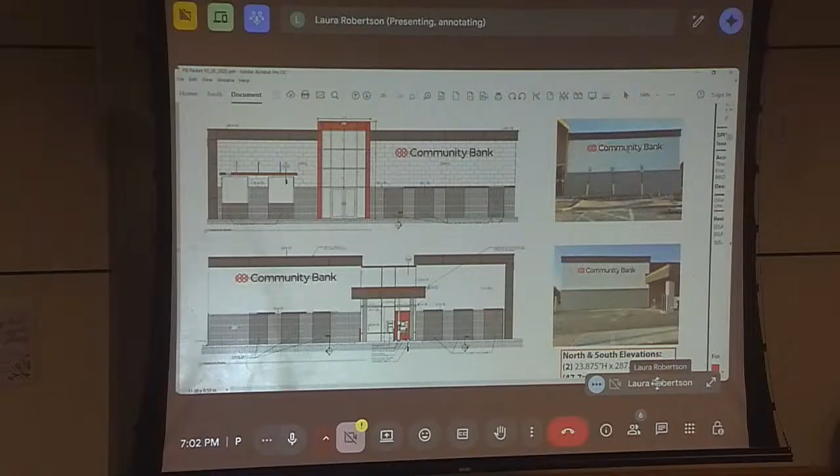Yeah, so the resolution is pretty straightforward. This is a code compliant signage package. We reviewed this at the last meeting. Open up to discussion. Anybody have any comments or concerns? Okay, looks pretty straightforward. So if you have any questions for the board, you can ask him. No questions from the board, as long as you have everything you need from me.

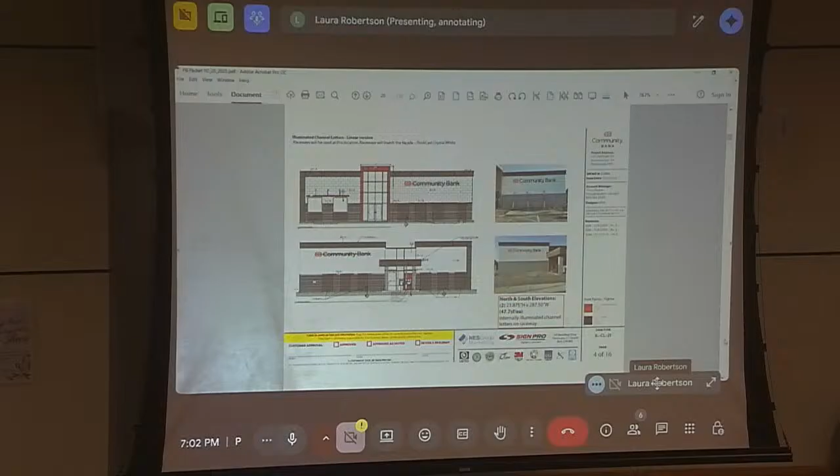Okay, next up is Resolution 2025-29, a resolution to make a recommendation to the town board regarding a site plan application requiring a special use permit for the operation of a place of worship at a single-family home at 3406 Albany Street. I am the project lead for that.

So the way that we're going to do this special use permit is I'm going to read the resolution and the conditions first. Then we are going to get the motions that we normally do. And then there are some findings that were part of your packet. We're going to read those findings, go through each one. And then if that needs to be edited, Ms. Robertson here will take those notes. We will then include those findings into the recommendation package that goes to the town board. If from that discussion, we need to have any other conditions or anything needs to be amended, we will then vote on those after, okay?

So now, therefore, be it hereby resolved that this Planning Board and Zoning Commission hereby recommends that the town board grant a special use permit for the operation of a place of worship at a single-family dwelling at 3406 Albany Street, as shown in the aforementioned drawings, subject to the conditions below and final site plan approval by the Planning Board. The findings for this recommendation by the Planning Board are attached to this resolution.

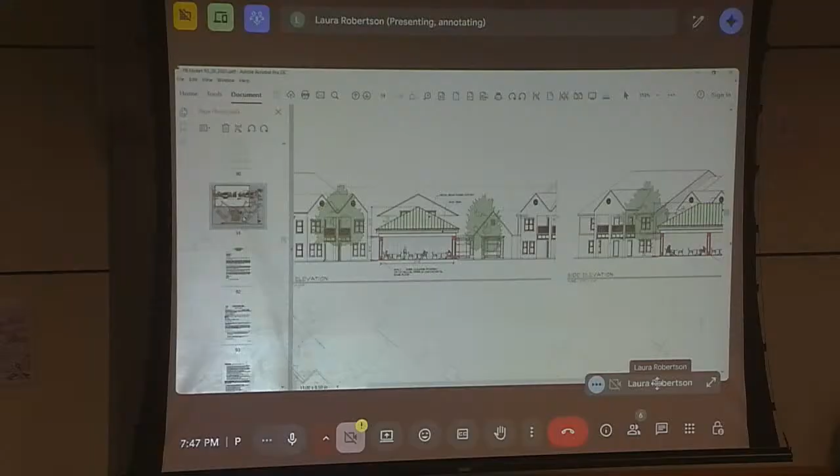Okay, there's no further discussion. Ms. Bergami, could you please call the roll? Mr. Laflamme, aye. Ms. Strang, aye. Ms. Bilowski, aye. Ms. Gomes, aye. Ms. Gold, aye. Chairman Darpino, aye. Resolution passes. Okay, that's it for new business.

Now on to discussion items. First up is 2757 Aqueduct Road, Niskayuna Harbor, an application for site plan approval for a planned unit development. Project leads are Ms. Strang and Mr. Laflamme.

Hi everyone, Chuck Bafundi, owner's rep. Good evening. So where we left off last time was, I think we got an overall consensus with the board that the sketch plan was in a good format. We reduced density, played with the layout to create better sight lines, and left that meeting with an overall outlook on trying to focus in on more of the conceptual layout of the design for utilities, which we illustrated at least a sketch concept of where drainage structures would go, stormwater ponds, water, and the low pressure sewer infrastructure for the force main.

We also focused on the recreational components with feedback we got from the board members and the planning department, adding sidewalk infrastructure from Aqueduct Road down through the initial phase of the townhomes, crossing the bike trail and connecting into where the overall clubhouse component would be, down near the pond. We then added a circulation trail around the rest of the core of the development, which goes around essentially the boundary of the property between the Canal Corps property and the bike trail.

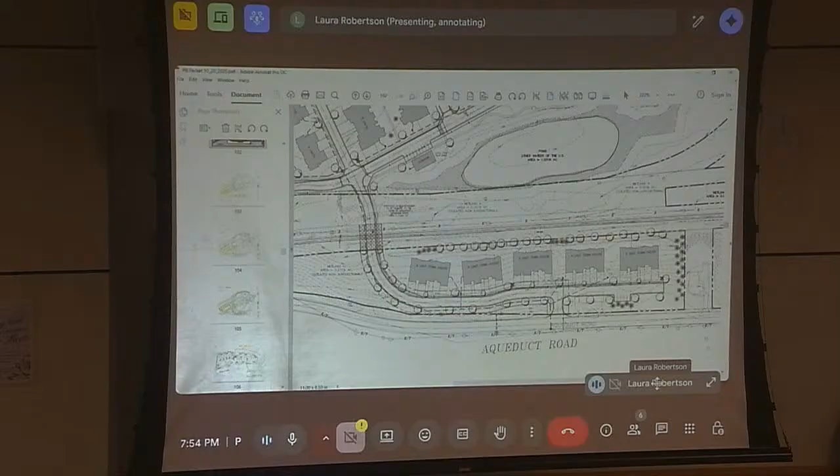So the initial phase, and I've been talking to Laura and Clark about phasing. Laura, could you scroll down to... no, it's okay. The first phase would be those first 20 townhomes out along Aqueduct Road. And then as we move in, dependent on market trends, it gives us an opportunity to go left with the 4 units if those seem more desirable to the market at that time.

Or we could go right once we cross the bike trail to more 8-unit, which is more of a big house development. But we've tried to lay this out so it has feasibility with market trends and gives us room to pivot left or right depending on what that market looks like at the time.

And then just the second question, I think you also talked about creating kayak access, but I know that was a little challenging. Can you just recap where that is? Yeah, so over where Laura just highlighted, the challenge is going to be just the grades, right? You can see in the topography there, it's steep. I think Brett did a great job trying to blend everything and make use of the topography that's there.

Aside from that, it just becomes an action of permitting and access with the Canal Corps, which we've done before. Laura and I have somewhat of a game plan and strategy on how to go about that, but it's just an outside agency involvement. We don't own the property, the town doesn't own the property, so we have to figure out what those partnership structures would look like, who takes maintenance and jurisdiction, how they grant us access. But we are illustrating it, and it's something we'll dive into as we progress through the rest of this.

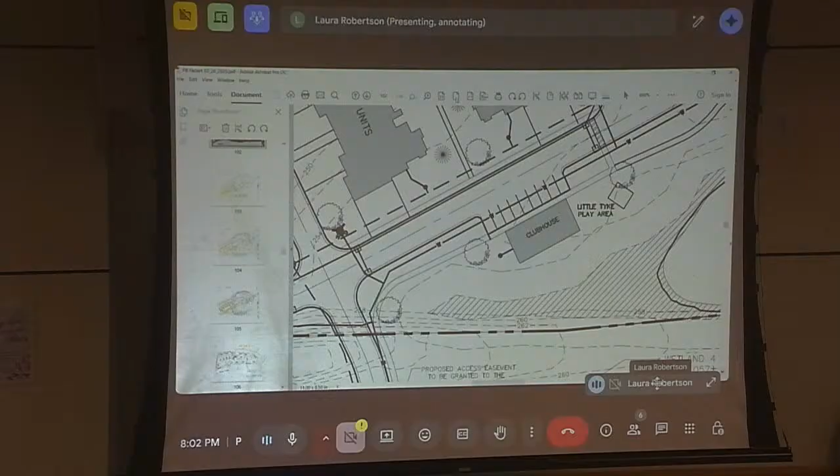I may have missed what you just said - where's the location on this that would be recreational? Was it the bottom? Was it the space in the lane? Our recreational spaces are right as you pull into the development, across the bike trail, take a right-hand turn, and near the 8-unit buildings is the clubhouse component right there. We have access to a little tyke play area, which was a request from the board. The main connectivity through the sidewalk infrastructure all funnels through there. And we thought that pond, especially with our favorable DEC and Army Corps decisions, was a great thing to provide access to within the community.

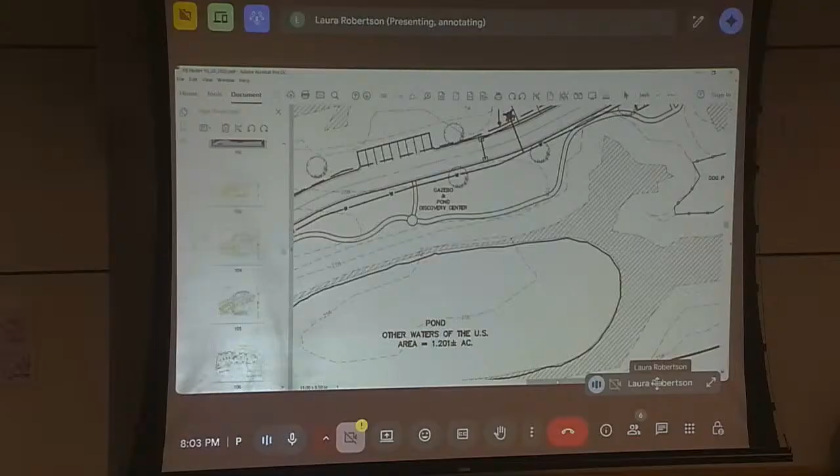We've largely kept a lot of the construction out of the 25-foot buffer that the town has, so I think we did a good job with the layout given the constraints we had. The other recreational components really wrap the property - that trail continues throughout the property along the outside edge and usable boundary, and then we cross the Canal Corps down to the kayak launch. Like I said, that was at the request of the board and the planning department - we're trying to make use of the parkland area. But I'll add that we have to look into the feasibility of that with the regulatory agencies - it may be outside of our control.

Maybe it's something like stone dust or mulch, something with less impact during construction that they'll be more amenable to, but that's still a hurdle we'd have to look into at your folks' request.

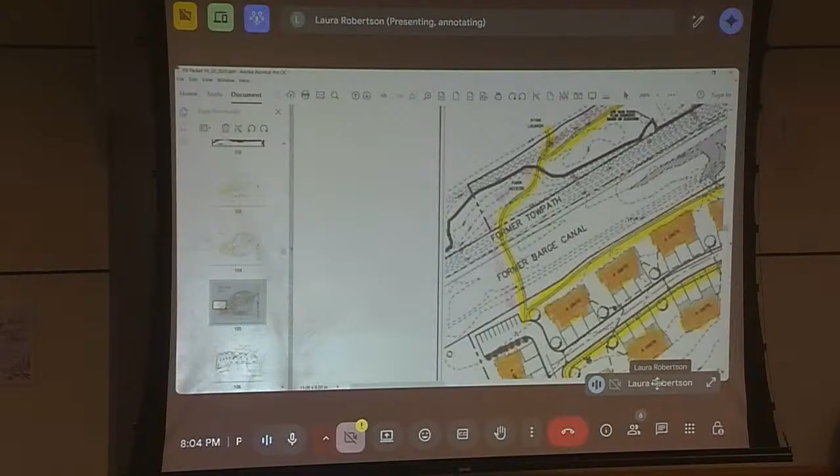So I want to build on that. With the kayak access, someone who's not living there could drive in and park where? I just want to make sure I understand it. So we created a parking lot off to the left right there. Got it, okay. And that's something unique we'll have to figure out with our attorneys, how the HOA is established with that kind of access, but I don't think it's insurmountable.

In terms of what concern? Just public access through an HOA. Yeah, we'll have to figure that out.

So I'll chime in on a couple things. I think generally I like the direction we're headed here. The less dense use of this plan as it's evolved has got some merits to it. The clubhouse, as you guys work your way through the site plan like you did on the previous project, taking a look at what that might finally become, whether it's larger, it's definitely got some space that could work and fit in there. Those are good amenities, where it's located right as you come in, the walking trails, the pond—it seems to be a really good fit. We'll encourage that to be developed.

I do agree with Mr. Laflamme. The 3 units that are clustered, the 8 units in the middle, are really just a tight area with a lot of asphalt around it. I know the previous plan eliminated that central road that went through, but the other component is that those 3 and 8 units have backyards relatively close to each other, and there's a walking path that cuts through. Those have almost no backyards. Maybe some people don't want that, but as we watch a development go in and evolve on its own after the developer sells off and people maintain them, the fences pop up, the barbecues come out, the chairs come out—people start staking their claim.

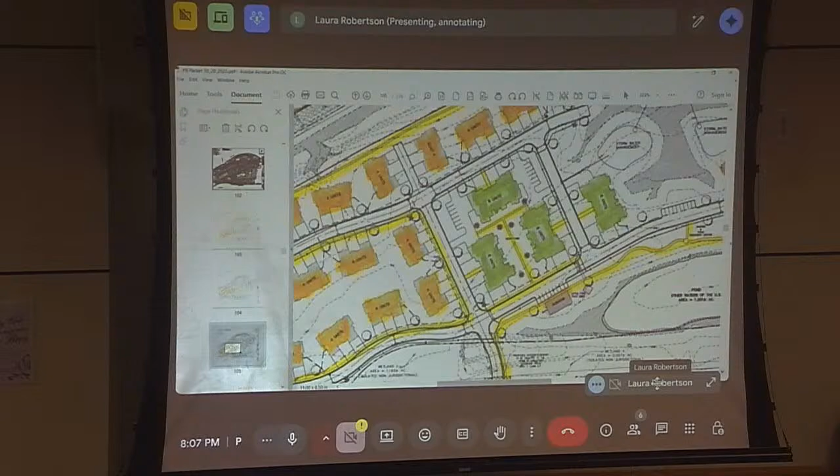Yeah, it creates a bit of a courtyard feel, but let me ask this—would you folks be okay if, overall here, with the way the roads are right now, it's a blank canvas essentially inside all 4 sides of the road? I feel like even with the infrastructure coming into concept design, water and sewer will largely be uninterrupted by any of these changes within this 4-sided area. I think it would be great to dive into the architecture of those buildings outside of just looking at the shapes as they are right now.

Maybe the architectural outlook will provide some type of opportunity. We're in sketch phase, right? We haven't involved an architect yet, we want to engage one. That back side of the project, depending on the scope of our architecture later on with whoever we select, may take a different course from these building styles as they're illustrated with Brett right now. I don't know where the garages will lay out, I don't know exactly where the parking lots will be or the entrances. So I think our biggest goal right now is trying to break into the conceptual design.

There's a lot of effort in concept design into preliminary, not only with outside agency permitting, but trying to deal with all the coordination of that alongside architecture. I guess my concern is I don't want to get so stuck on the sketch right now with the buildings without knowing what the buildings are. I just think it would be great to involve an architect into those conversations. Maybe they can put a different twist on that block, if you folks are amenable to that.

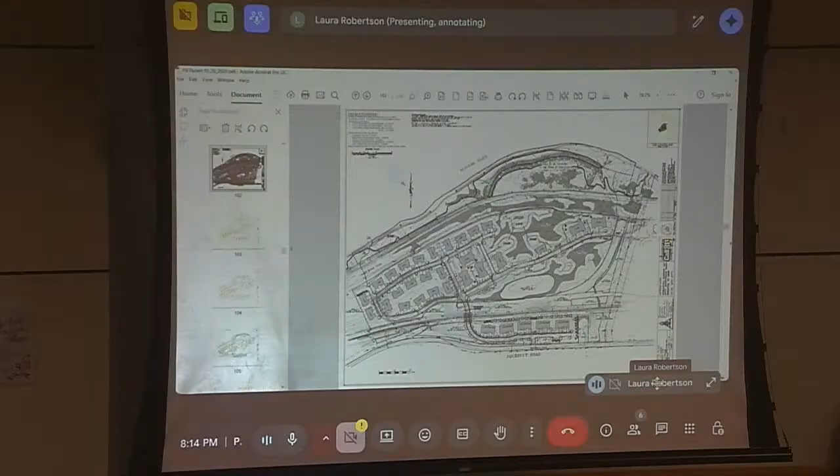I'd recommend any board member take a walk down there, I'd be happy to give you a tour. Since 2025's DEC wetland regs, there's things that are now unachievable. If you look at the wetlands coursing through that area, it's largely undevelopable. So the idea that we can construct this beautified park down there is just unobtainable.

I think Brett brought up a good point at one point: what does parkland mean? Does it have to be this modernized park, or can it just be foot trails and connectivity to nature? I think that's what we can achieve here.

I'm not arguing—we'll look into what we can do to expand the kayak launch area or look into motorized boat docking. But I think it's not largely that kind of park, right? The grade and topo and wetlands negatively affect the potential, is all.

I would agree with that statement. I don't think we're asking for that. I think these natural, unasphalted—not multi-use path, but just a walking path—nature that people could transit, that's great. But the water feature is unique to the property.

And the ability to come visit someone living there and have a place that's safe to put your boat temporarily, that'd be great—just kind of thinking ahead a little bit there. But no, I like the natural approach, everything you described would be perfect.

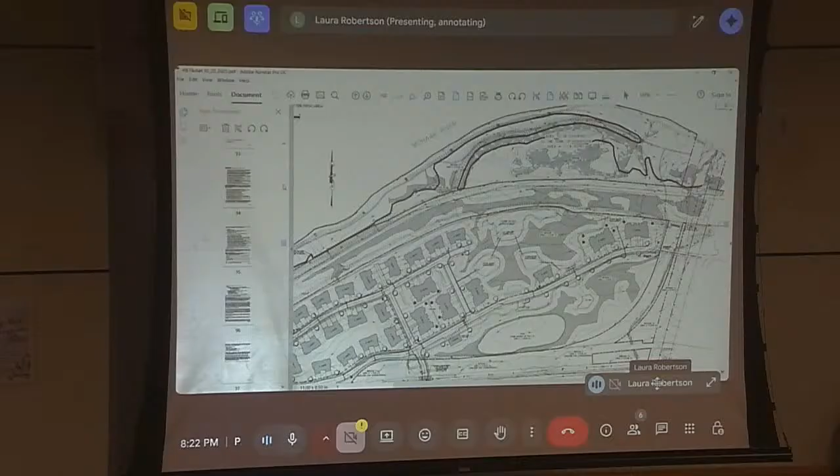Would that be amenable? Yeah, actually Rivers Ledge has a public multi-use path that goes right along the National Grid property and may have accidentally gone onto the National Grid property. So it's not really private to private because it needs to connect into the public multi-use path on Rivers Ledge.

I'd just like to say something I'm very passionate about. Do you know where Fieldstone Estates are on Consaul Road? I'm going to beg you, please not to do that. Because that's something I absolutely wouldn't support. Please don't make them look like cookie cutters. I know you said you were already kind of discussing that.

Do you not like the design of that building, or would you just like to see a variation in color of the building? Because I will admit that we are looking at buying the Fieldstone drawings for the front 20 units, but we talked with Laura and Clark and they brought that up - they do not want consistency in color. We were going to do a variation of color so it more appropriately relates to the building next door with Louisi's Senior Complex. Obviously, we know that some changes will be made to the drawings we're buying through ARB.

Like the exterior material, right. It's like the structural and layout. It was a very good product that the market reacted well to. So yeah, thank you. Okay. Yes.

But Rivers Ledge doesn't have the same orientation along the street like Fieldstone Estates does. That kind of gets back to Dave's comment where you might be able to massage these buildings a little, but I don't think you need to have the exact building locations ready for recommendation for tentative zoning approval. It's a natural process - when you get through doing engineering, you're going to have to tweak something, move setbacks. But where you position most of the buildings, I think is good.

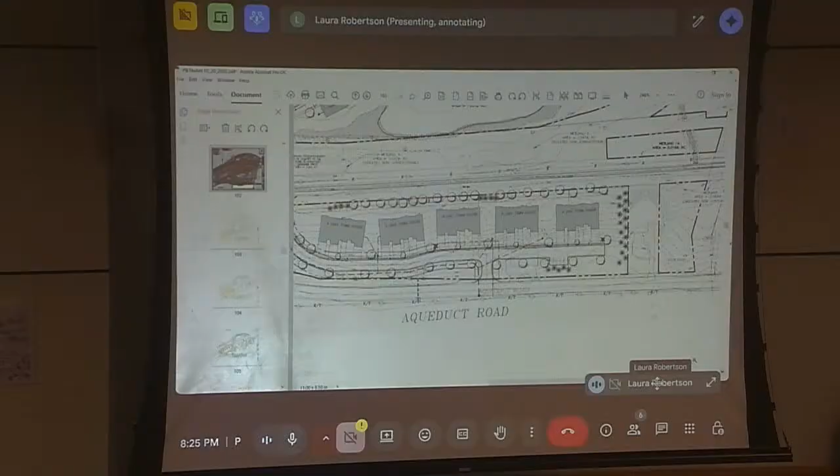So to kind of summarize, you've got some takeaway points here. Take a look at the diversity of the homes, the connectivity to the waterfront, working on some of those agreements with state agencies. And then take a look at the feedback on that central internal loop road where the 8-unit townhomes are - then I think we can definitely keep moving forward. Outside of that, those are the main items to try to move towards a tentative zoning recommendation.

And you'll look into traffic - it sounds like traffic and those things are after the recommendation. I can't remember off the top of my head on that; it may have just been written into the preliminary engineering report. So I'll check. The reason is I don't want a couple meetings to go by and all of a sudden I need it, and it's something that takes 2 months to gather with data collection and everything. So I'll check on it.

Can I ask one question? The sidewalks highlighted in yellow - it says sidewalks and walking path. Is there any way to delineate what is private and what is public? Because I'm assuming the sidewalks are for the residents, but it's all yellow, so if I'm walking on the path, I wouldn't assume I should be walking in between the area of the green buildings, like that would be private.

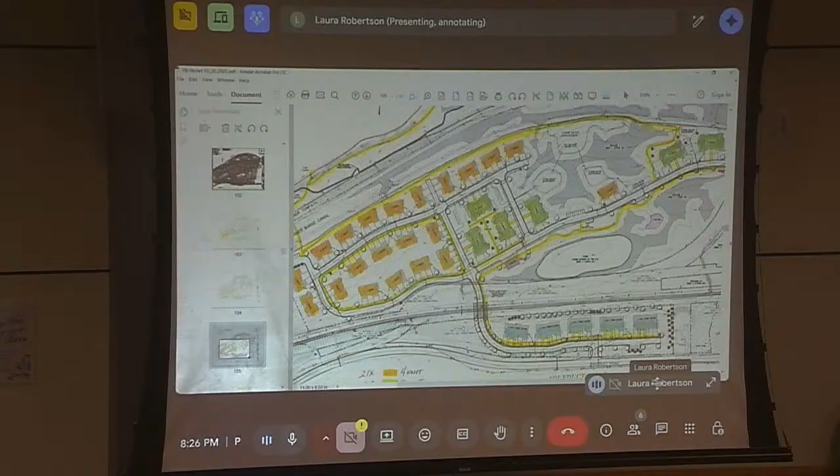Yes, we could illustrate what we would look at as private and public. Like most developers, we may have things that we overall have an outlook for that are written legally in the HOA documents, but I think everybody usually finds their way once they get in there. But I will illustrate something for the board on what our long-term direction is.

And then I just have one question, sorry if you already said it - the 8 units, are they multi-level? Yes, that'd be 2-story. Okay, and when I say double loaded core, it's usually something with common core hallways, right? Our 4 units may be a different architectural design than that.

So that green space doesn't belong to anybody really - is it going to be shared? That's correct. The condominium corp will really just be the building, and everybody will own their condo within the building, but the lands are largely owned under the legal mechanism through the HOA. And I can provide an idea of a write-up for the board to understand that.

I'm by no means a specialist in this, but we have one of the leading firms in our Albany area working with us on it. We could give you an overview of what that looks like.

Yeah, because when I envision it, I mean no one can really just stake a claim, like sometimes if it's single you can kind of say, oh, this is in front of my sliding door and this is mine. But really with this setup, it looks like a communal space.

It is a communal space, and that goes to the point that within the HOA laws there won't be opportunity for fences, sheds, and cookers. There'll be really strict community rules, so you won't have that shared concern of people having a mess of everybody's outdoor accessories in the backyard. The HOA is going to drive the policing of that.

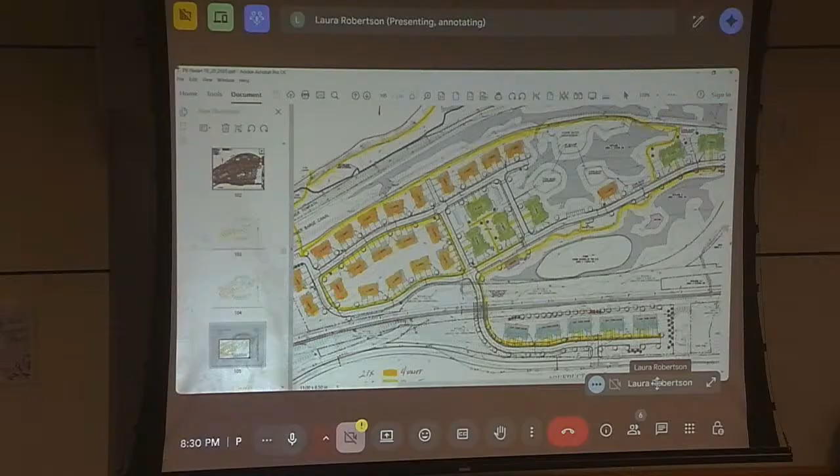Chuck, the other thing that Laura and I commented on, looking at this from the planning department's perspective—I know we're in early stages—but there was no place for residents to gather and sit and look out at the river. River's Ledge has several pavilions where they could have a cookout or take advantage of the proximity to the river. So maybe something like that can be worked in as it progresses.

Yeah, we could look at something in that overall area down by the kayak launch, and we're trying to make use of our pond. But an overall scenic vantage point from the upper topography of the development out to the river is largely going to be obstructed by forested wetlands. I'd love to create waterfront views, but we're not cutting down trees in there. Which the tree council will like.

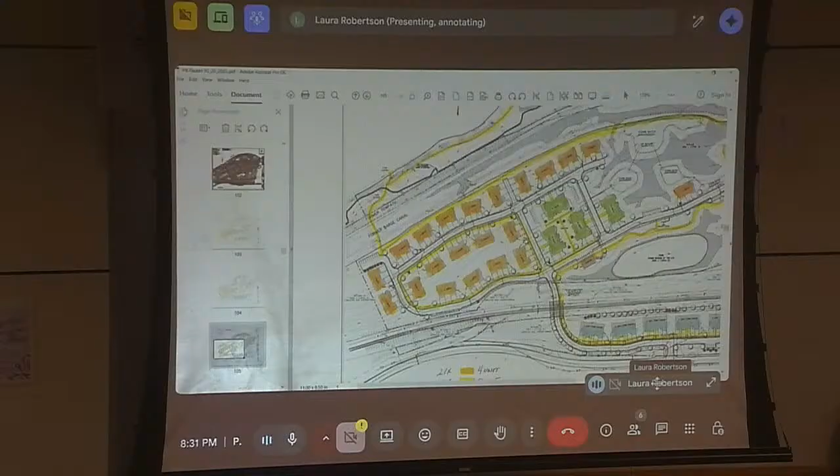Just for the record, Complete Streets and Tree Council have been looking at this and they just want to make sure it's okay for them to walk the property. Absolutely, and if they want to meet me, we could set up a meeting and I can do those walkthroughs. I'll tell them.

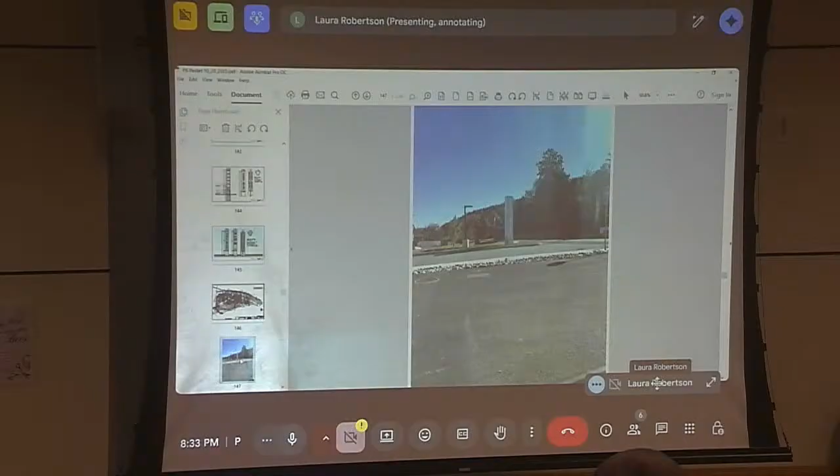So part of the purview of planned unit development is that the planning board is allowed to review this signage, correct, Laura? Mhm. So there's a table that was in the package, just to quickly recap where the proposed signage is going. It doesn't trigger any type of zoning review or referral there.

So let's talk about the marquee bollards that are there. What's the total height on those? I don't know, but I'm sure. It was 16 feet total height, 16 feet 4 inches. So it's definitely something larger than we normally see on typical signage around the area here. What was the design parameters behind that?

I wasn't involved in the design. I actually didn't even know they were going up until I drove by and saw them myself. Yes, ma'am. No, that's okay, I wasn't behind the design of them.

I think that the height of it was coming down on the River's Ledge sign. We wanted to go vertical, not horizontal just because of the location of where they were. They might have protruded into each drive lane there.

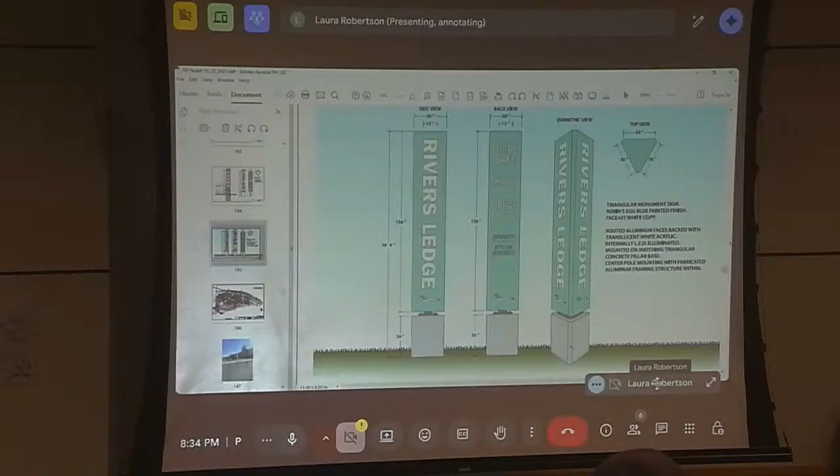Sorry, can you just speak? I know you said you didn't know they were going in, so they were pre-designed and you didn't realize they were being fabricated? I wasn't myself. I wasn't involved in that process with the signage, with the company putting them in. I just wasn't involved in that process at the time, truthfully.

I would say normally the sign companies would give them direction to come. I don't know what this sign company is. No, we know, Action Signs. And they didn't reach out, Laura? No.

I do think on a fast road there's some advantage to a vertical sign with those tight entrances, but it is taller than almost any sign we have in town, I think, probably. I think you're right, Laura. But it's also not, I mean, we do have for apartments, we do have 16-foot wide signs sitting on the ground. This is just this way instead of that way.

With it being a PUD, are there any unique exceptions made? No. I mean, it's something like almost a lesson learned, I think, for the next one, because we really didn't discuss signage during the site plan of Rivers Ledge. It didn't make it in. Because essentially a planned unit development sets its own zoning, the planning board can definitely review these, and if they do feel like it's appropriate, they don't need to go to the zoning board or the town board. It's part of the site plan.

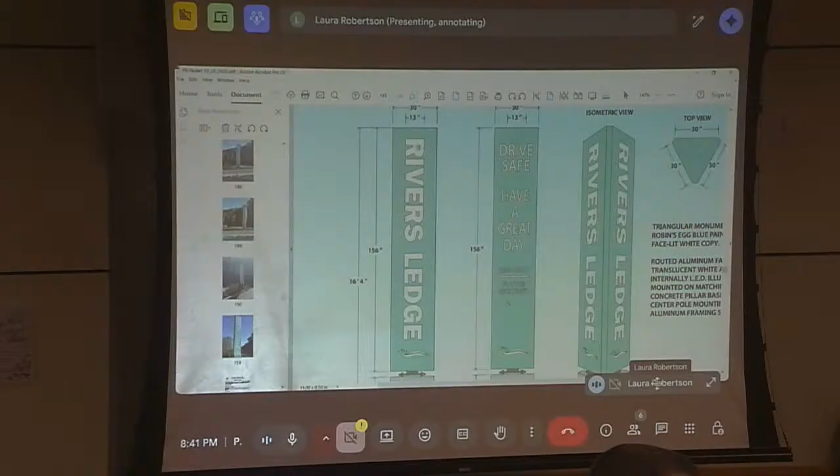Yeah, I agree. I live right there. I actually wasn't sure that they were on at night. I think you can just read the letters. But we do usually require timers too.

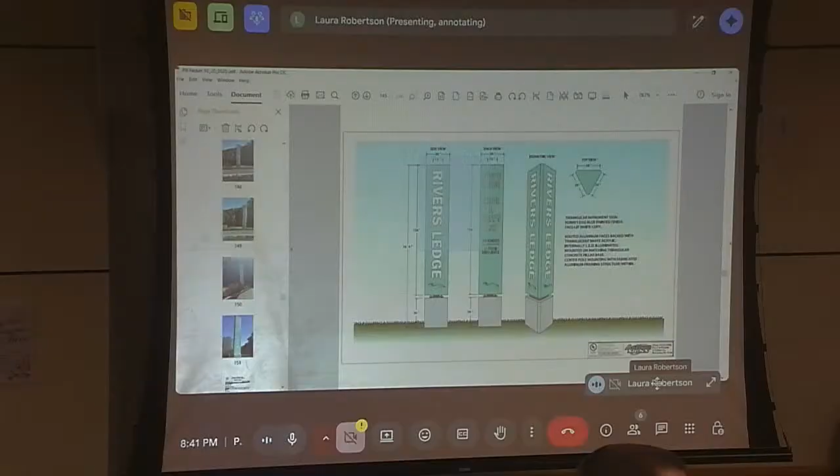But I just want to clarify, the River's Ledge is lit so people can see it when it gets dark - the letters. But the drive safe and have a great day, is that the opposite? No, that's lit as well at night. That faces inside. No, I get it, I'm just questioning.

Okay. You'll probably be surprised, but I don't have a problem with the lighting, because of that safety area. I think it's really helpful - it helps people know for sure where they are. I have not seen it at night, so that might be open to a little revision, but generally, I think it's helpful to have lighting on it.

One of the drawbacks of it already being in place - I concur. I've driven by it. It was subtle, gave me an awareness, but it wasn't like this bright thing sticking out. I'll be honest, I think the height does fit the property, but I also think maybe it didn't need to hit 16 feet. But I do feel like the size gives some awareness, and the large scale of the property, it kind of fits.

And then the monument style sign that you're proposing is in addition to this? Correct, and has not been built yet. And also facing Aqueduct? That's for the next phase. It would not be facing Aqueduct, that's internal. Where would that be?

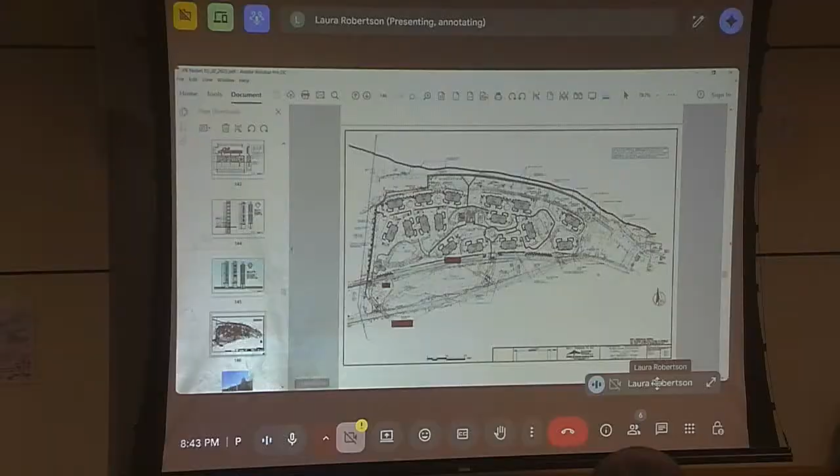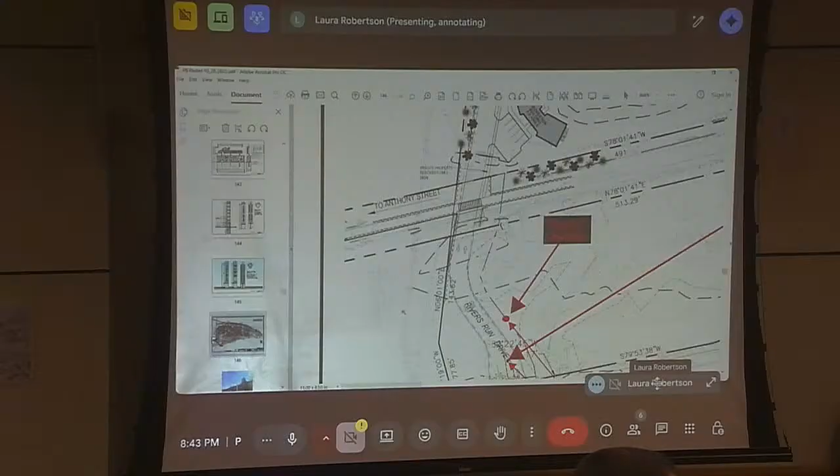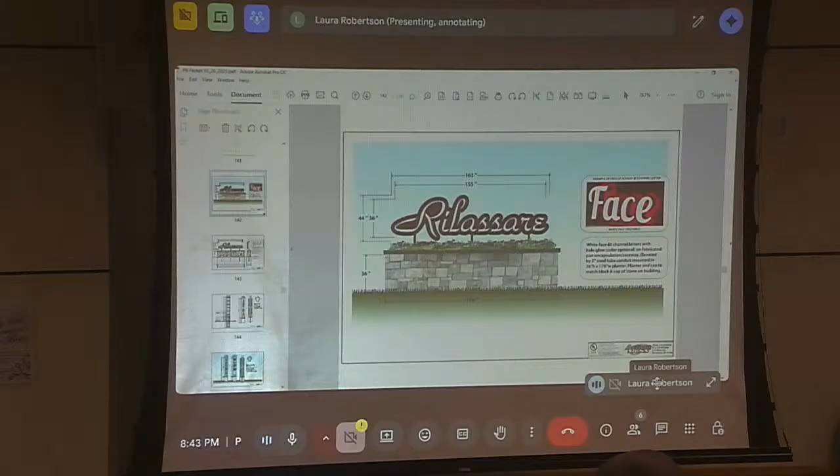One of the unique situations with this is that we could have a project lead get assigned to this and encourage everybody to go by during the day and at night. We've done that with other signage around town for some things and gotten feedback on it. If not everyone's had a chance to take a look at it, that would be helpful in order for us to render a decision.

Obviously you're coming here a little bit begging for forgiveness, but the uniqueness of the PUD may help this case as opposed to a direct order and a violation to have you take it down. We want to work with applicants as they come here. So in fairness to the board and the applicant, we'll have somebody assigned to take a look at it, get that feedback, and between now and the next meeting all of us take a look at it so we can collectively go back and give some positive feedback.

The temporary flags that you put out there, how often do those stay out? For the open houses, typically we like to put them up once a month. They'll come down once we're fully leased at the senior building. As far as now-leasing, we're looking into doing something a little more permanent, which will certainly come to you before we do anything like that.

Was it not currently open? I don't think so. It is open. Oh, it is open? Yeah. Oh, okay, the windows will not be papered over. You can see right through the windows, it's clear, the windows are clear. I think they have some kind of picture on the window. Well, we can look, yeah.

You can't really see the windows in this. You can see some of them though. It looks like they're mostly open. I think you can see through from inside, but from the outside you can just see the pictures.

How about signage? Any change, or is that separate? We should change the name on the sign. If it's code compliant, the planning department would just take a look at it. If it's excessive in size, you'd come back to see us again. The sign is the same size, same color. Is the current sign compliant then? Yeah, I believe it is.

Okay, so if it's pretty straightforward, we'll get a tentative resolution for the next meeting for the tenant change. Thank you. Appreciate it. Thank you.

Okay, next up is 3900 State Street, an application to combine 25 and 17 South Fagan Ave properties with the existing Kia automobile lot at 3900 State Street. That includes removal of one single-family dwelling and extending the automotive sales lot onto South Fagan Ave. The project lead is Mr. Laflamme.

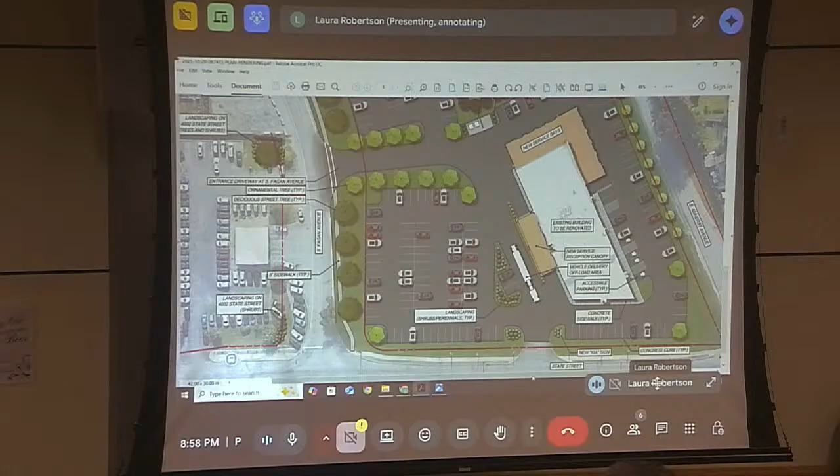The spruce tree is being saved. It's in the corner of the expansion lot toward the top of the page. So this is the spruce tree, and we've got some clearance around it that can be maintained.

We're showing street trees along Fagan and a 5-foot sidewalk connecting to the existing sidewalk on State Street, and proceeding to the edge of the property at 33. So new street trees, new sidewalk along Fagan.

We're also showing trees along Amherst. Those will need to be a little smaller, more of an ornamental tree, because there's a wire that will conflict if the trees aren't a smaller variety along Amherst. So we have new trees there, new street trees here, and some tree planting along the new entrance drive where the truck will be entering to get into the site.

Did you mention they moved the dumpsters? Yes, the dumpster currently is in this corner, somewhat close to the residential property. The dumpsters now will be located here, which gets them to the 25-foot offset from the residential line, and they will be screened there, both by the trees along the white PVC fence and by the enclosure around the dumpsters themselves. So much better position relative to the residences.

I have a question, not to interrupt, but the double stacked parking doesn't exist in this diagram. The double stack parking isn't shown in this layout. No, it's not, and there may be some double stack parking that takes place in some of the lots designated for new vehicle parking over here, but we're not showing that specifically now. The way the layout shakes out now with moving the parking down to the right-of-way line on Fagan makes a little less sense from a layout perspective the way it is now.

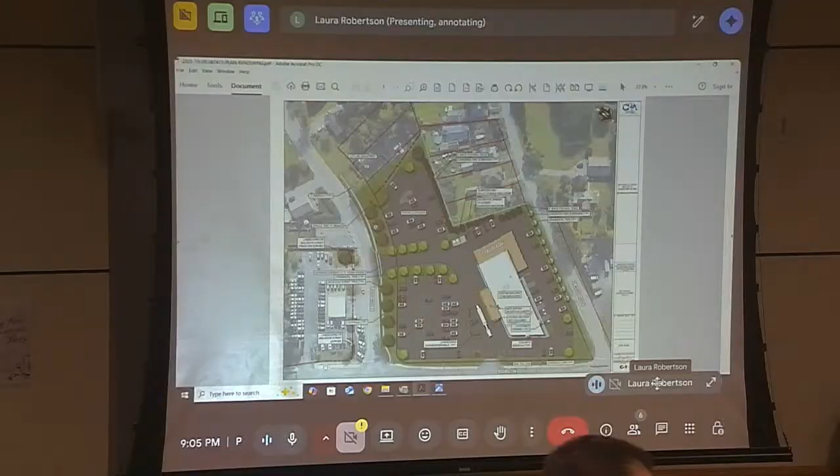So at the end of September, you had the town board meeting and the project was approved for the application, a special use permit. And with that came a bunch of findings. So like we did previously tonight, if this is the plan we're moving forward with, we'll do the same thing - go through those findings and start to refine that. The TDE will be brought on board. I believe the next step is to get this into the final design phase for site plan approval, correct? Yep, we need to go through detailed engineering with grading, stormwater, and advance the plans.

Well, I think just seeing this plan in the packet for this meeting tonight is definitely an improvement. There's quite a lot of enhancement of plantings and green space. It looks like you've thought out using the detention areas as buffers and how to downstream that naturally. Circulation around that trapezoidal site is not easy, and showing where the tractor trailer comes in and discharges out is a great safety improvement, along with all the other pedestrian upgrades around that. It's a tough site - there's a lot of topo there, losing 20 feet from Amherst down to Fagan across State Street. So there's a lot of topo, access considerations to get a tractor trailer on the site - there's a lot going on.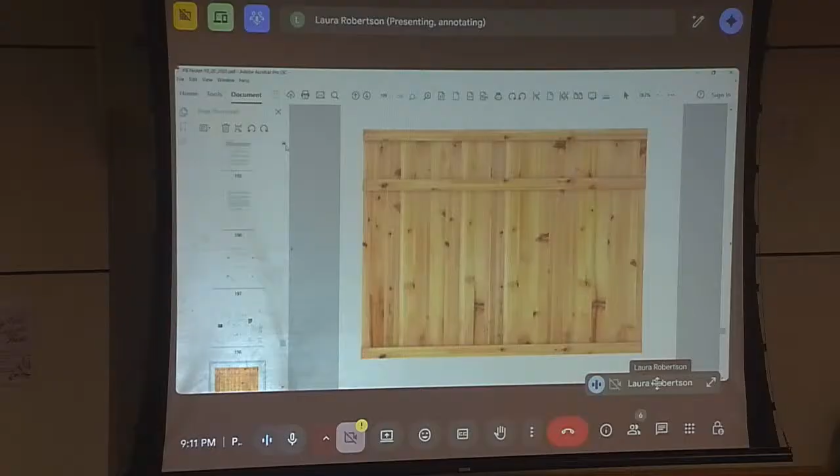It's made to be durable and to naturally weather. In 4 or 5 years we might stain it the way you would a fence, but we thought having it naturally gray was fine. If you folks feel more strongly it should be synthetic material, we're going to do some landscaping around it too. We thought it was the better design choice, but it's certainly no less expensive, so if people prefer plastic or fiberglass fencing, we'd be happy to do that.

I'm sorry, what kind of cedar did you say it was? It's just cedar fencing. So that's more durable? Yes, it's meant for this climate.

And just to confirm, the truck will come from Alton back into the driveway to pick up, drive straight in, pick it up, and back out. They usually come very early in the morning before the schools are open, and yes, they would be able to back in. We've confirmed that.

Actually, I had to Google it because I've never seen an enclosure made out of wood, usually it's a gate of metal or something. It says cedar fencing is very good for the winter due to its natural resistance to rot, decay, and moisture. That's extremely surprising, I learned something tonight.

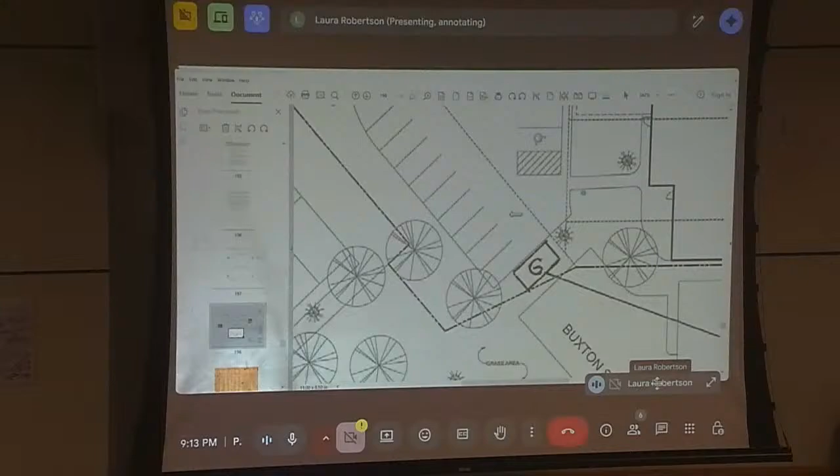Are you saying you want me to come back with a landscaping plan? Yeah, I think we should make sure that the landscaping is on the plan. There is some landscaping there now, but yeah, I can do that. So that would be a more detailed design you're looking for?

Yeah, because we definitely would want to screen it, like a 6-foot fence, which isn't typically allowed in the front yard of a home. So it's tall and it's going to be basically in the front yard of that home on Buxton, so I definitely think you're going to have to soften that transition from the residential home to the commercial. Yeah, we're happy to do that.

We know that it's kind of in the front yard. There's kind of a berm there, if you remember, from when Buxton was closed, so it's another consideration, but yeah, we're happy to come in with that.

I actually have quite a bit of plant material, some hydrangeas and other shrubs that I purchased from Northern, so we can use that. Would I have to come back for another meeting to get that approval? Yeah, you have to come back for one more meeting anyway, at least. Yeah, we can, right.

So you can take this plan here and show landscaping on it, as we just talked about. And then we can have a tentative resolution for next meeting, because it's relatively straightforward.

The other thing that would be helpful is if you took a photograph, maybe looking down from Buxton, and one from the back parking lot. That way we can see where it's going to be positioned in relationship to the building and the back area adjacent to the school. That's always helpful.

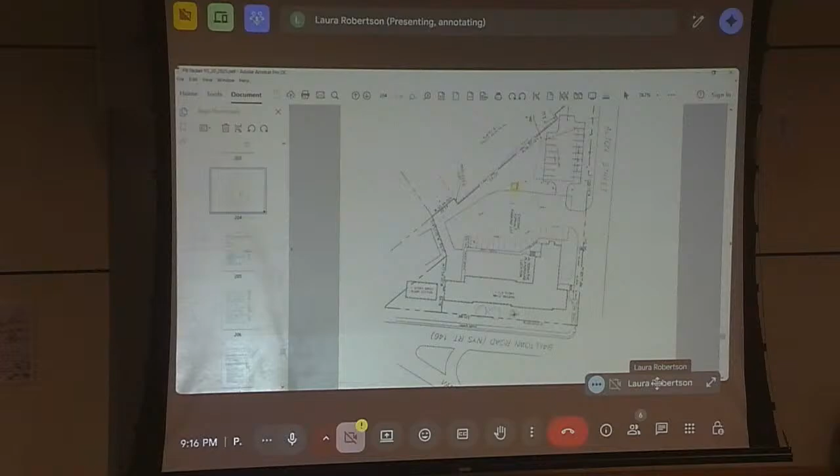All right, so anything else you want to see on the next go around besides landscaping? Yeah, there's photos. They're helpful to see. I think if anybody drives by there, if you pull in the lot, you'll see that with some additional landscaping, it will not negatively impact that house that is there. Okay, all right, thank you for your time.

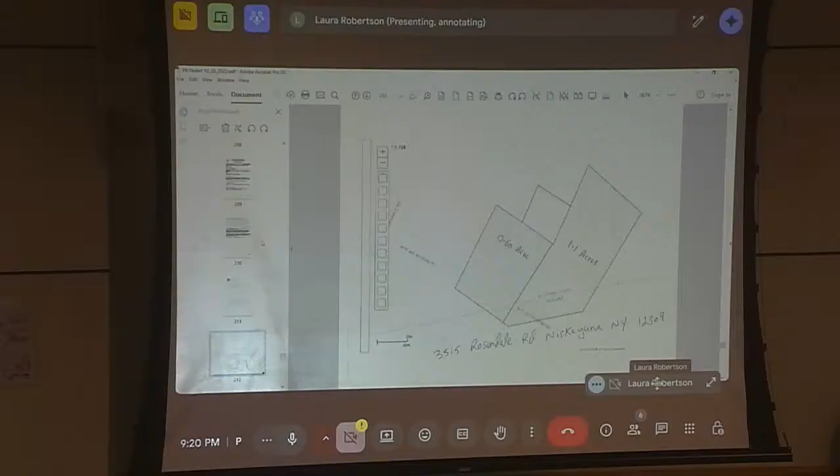Which would then be like a lot combination, wouldn't need planning board approval. Correct, you could just combine them. Okay, so I think we understand the intent of what you're looking to do here. But the next step would be to get an actual survey drawing with real contours showing the locations of the housing, proposed driveways, where the lot would be divided up. Then once that's submitted to the planning department, we can take another look at this.

The only other thing I have to check is the easement - that road is like an easement, it's not a public road, but it's public. I just have to check the easement and make sure that actually counts as improved frontage.

That's fine. You can drive through there - there's no barriers, you can cut through there if you choose to. But I think, because Mr. Lisi actually had a development on here at one point, it did have - I think it's actually an easement between this owner and the Colonie property. But I'll go look at it again.

So I do have another question. At the beginning, you said it's going to need two towns' approval. So while I'm working on the survey, because it's going to take me a few weeks, are you guys going to work on getting the referral from Town of Colonie? So I think we need a more comprehensive plan package to present to them - they're going to ask the same questions we do. They're going to want to see an engineered survey drawing showing what existing structures are there and what you're proposing. Once we get that, it makes the process go a little smoother. I can reach out to them and let them know it's coming, but they'll see the survey drawing too.

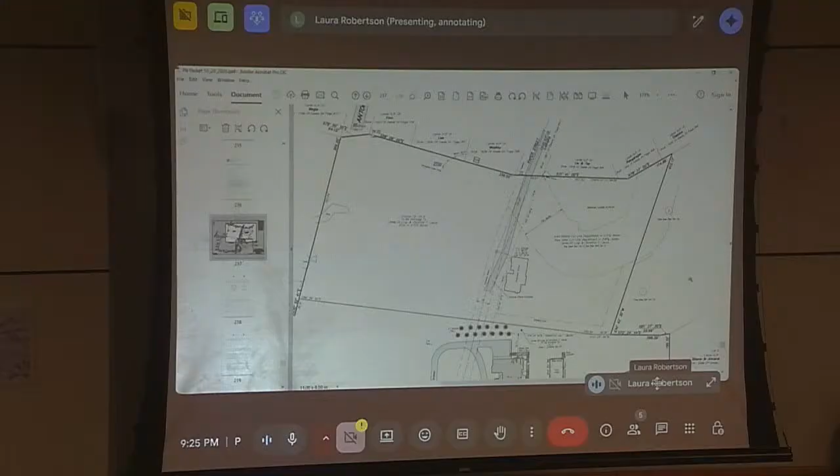Antonia is developed. There's water, sewer, and a paved road to the end of Antonia. So I own the paper street. Even shows La Rappa used to own it. I bought it from them, and so he'll have access onto Antonia, which gives us the frontage. And putting the house consistent with my house, and my daughter's house is just south of that, so we're all kind of in line together.

So I'm here for a major subdivision to get this. So I think it's... is it 3 acres? I can't see the acreage. I forgot, is it 6 acres? 3.5, yes, there it is. 3.57, yes. So we'd probably do a lot line adjustment to get the land to combine with the parcel that came from Posanelli.

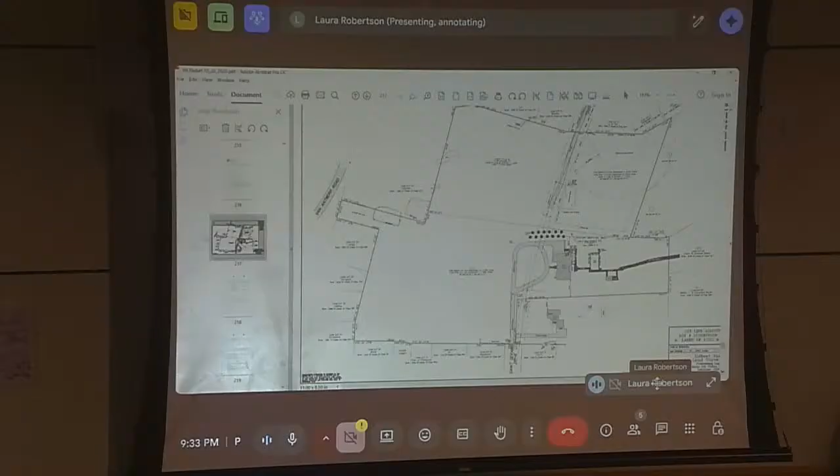So is there something you guys would want to see on the sketch plan? Because we wouldn't normally do engineering until after sketch plan. Would we want to see the stream course, the intermittent stream course, on there? The topo lines are always helpful, maybe showing where the existing water conditions are, and then clearly outlining where the new lot subdivision is.

Just bolding those lines, or even in red or something, so it's crystal clear. We already have engineering done on this from when we did the first plot - water, sewer, and topos are all done, so we already have those. Add topo, and kind of water flow arrows or something.